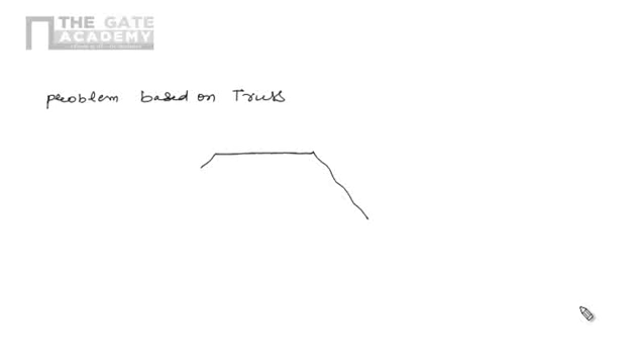Now we will solve some of the problems based on truss. Problem based on truss. Now in the problem, a simply supported truss is given. I am just drawing the simply supported truss which is given in the problem. I am just drawing the various members of the simply supported truss. So this one is the simply supported truss.

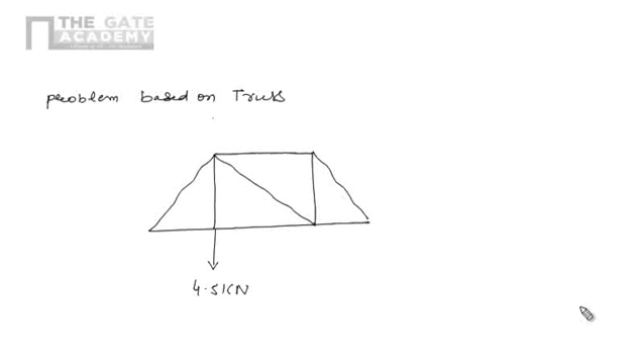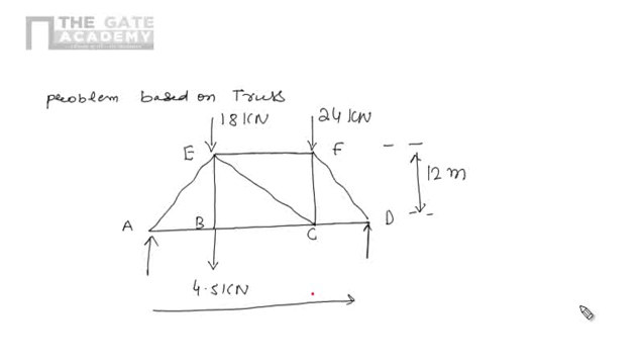Here we are applying a force of 4.5 kilonewton. Here we are applying a force of 18 kilonewton. Here we are applying a force of 24 kilonewton. And these are the points A, B, C, D, E, and F. And here there is a simple support. Here also there is a simple support. And this distance is given 12 meter. And the whole distance is given 3 at the rate of 9 meter equals to 27 meters.

So this is the given problem, in which we are interested in force in member FC. So here we are only interested in the force in FC. So definitely we have to use the method of section. But before applying the method of section, or as a part of method of section, first of all we have to find out reaction at the support. So first of all we have to identify the supports. Here there is simple support at A and D. So we know at simple support there will be reaction RA and RD.

So now for finding reaction RA and RD, we can apply the condition of equilibrium. Here there is no horizontal force, so directly we are applying the condition based on vertical forces. So algebraic summation of all vertical forces should be zero. This one is the equilibrium condition. So vertical, or we can say along y direction. So this one is positive y and this one is negative y. So algebraic summation of all vertical forces or forces along y direction should be zero.

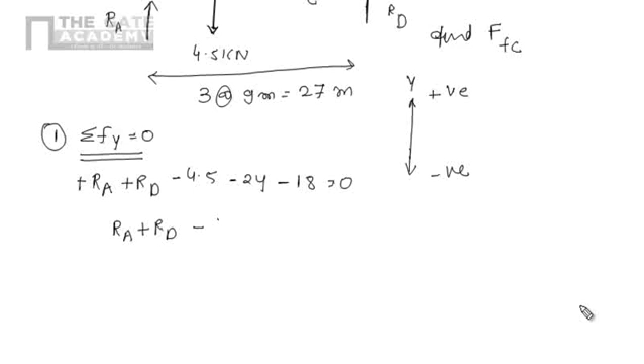So there are forces in y direction. RA is acting in upward direction, so positive. Similarly, RD is also acting in upward direction, so positive. This 4.5 is acting downward, so minus 4.5. This 24 is also acting downward, so minus 24. And this 18 is also acting in downward direction, so minus 18, equals 0. So RA plus RD minus 46.5 equals 0. So RA plus RD equals 46.5.

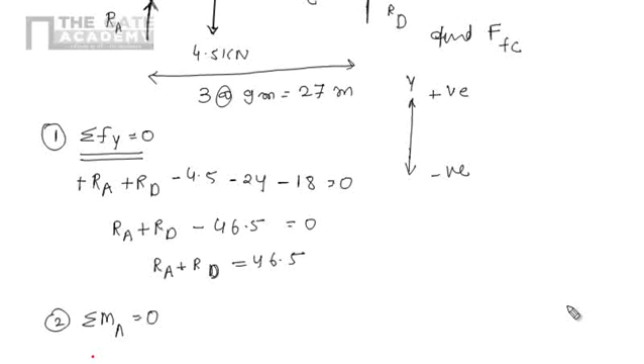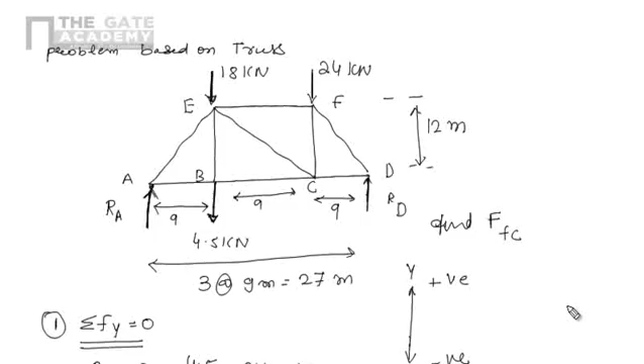Now apply condition number 2, that is algebraic summation of moments of all the forces about A should be 0. At A we are having the force RA, so moment due to RA at A will be 0 because the perpendicular distance is 0. So RA into 0. We are having the force 4.5 kilonewton here and the force of 18 kilonewton here. This distance is 9, this one is also 9, and this one is also 9. So moment due to this 18 and 4.5, we can write 18 plus 4.5 into 9, because the perpendicular distance is 9. And by our convention, clockwise is positive, anti-clockwise is negative, so it will be positive.

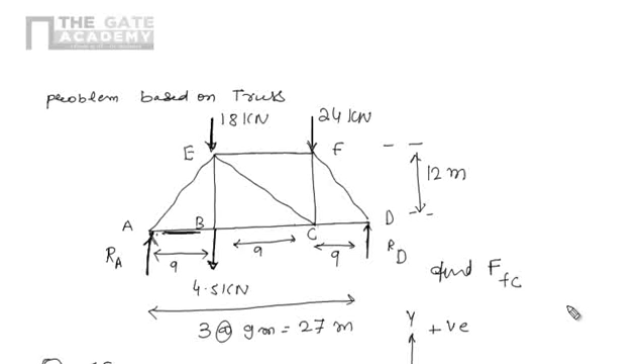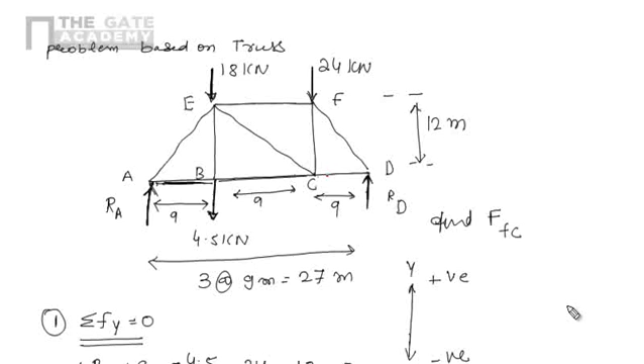Similarly, for this 24 kilonewton, the line of action is passing through point C, and the distance between A to C is 9 plus 9, 18. So the moment at A due to this 24 is 24 into 18, and the direction is clockwise, so positive. Due to RD, the perpendicular distance is 9 plus 9 plus 9, that is 27, and the direction of moment is anti-clockwise, so negative, equals to 0.

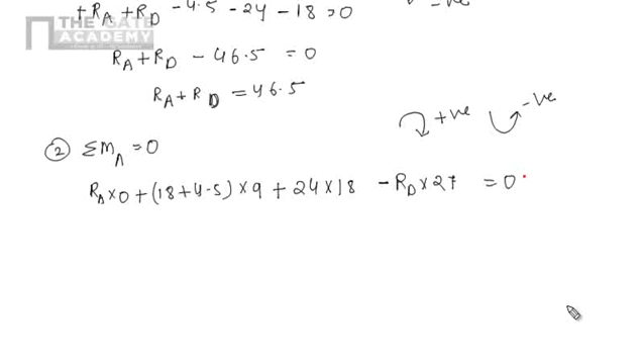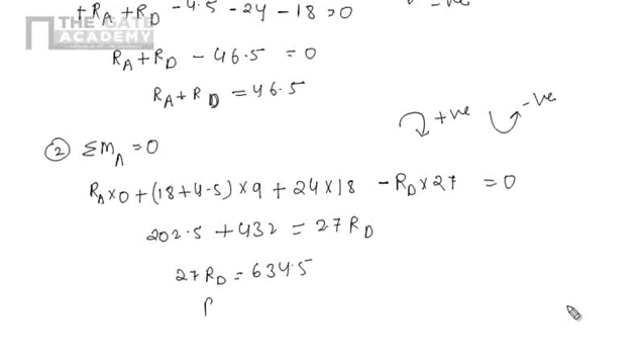If we solve this, we have 202.5 plus 432 equals 27 RD. So in total, 27 RD equals 634.5. So RD will be 634.5 divided by 27. So RD will be 23.5 kilonewton.

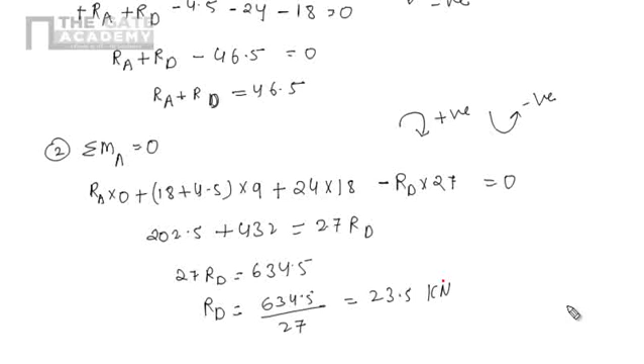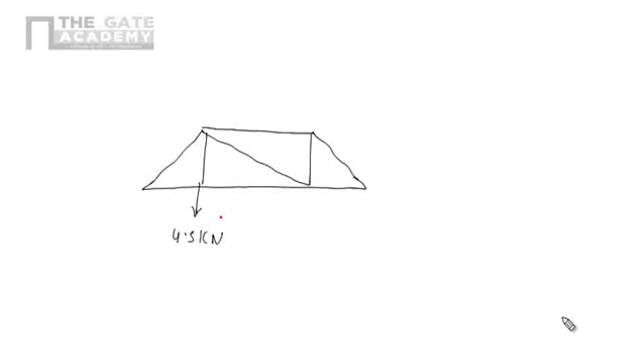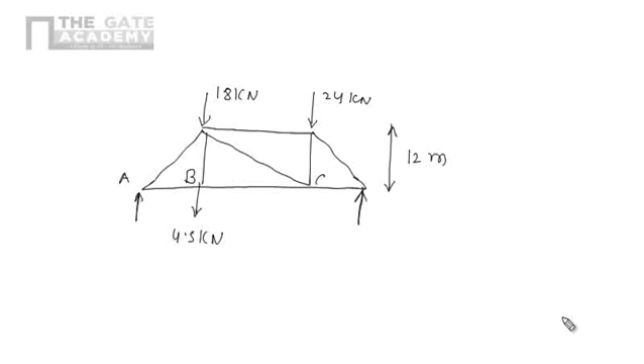Now we use the method of section for solving this problem. So I am again drawing the given truss. This one is the given truss. And these are the forces: 4.5 kilonewton, 18 kilonewton, 24 kilonewton. This distance is 12 meter. This is point A, the support is there. These are points B, C, D, E and F, and these distances are 9 meter, 9 meter and 9 meter. So again I draw the truss diagram.

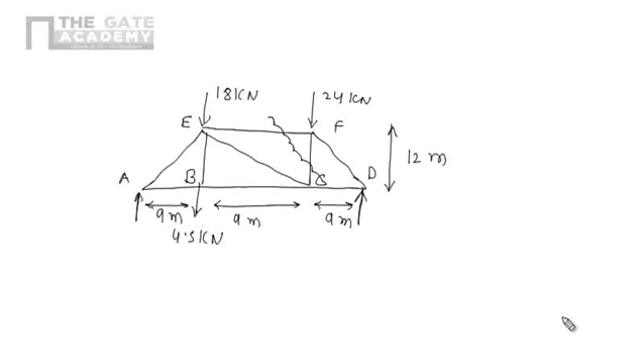And now we are interested in the member FC. So by method of section, we have to cut the section such that it passes through 3 or fewer members. If we cut the section like that, then we can easily solve this problem. So now draw the free body diagram of the smaller part.

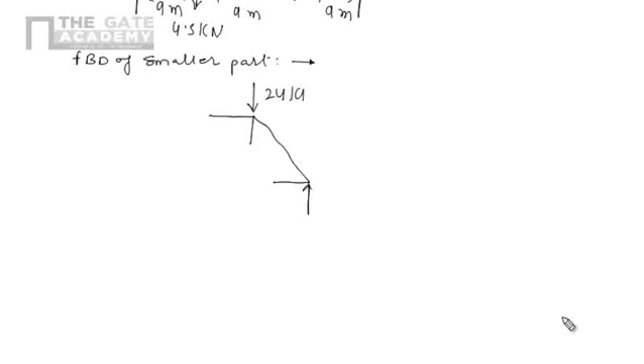So this one will be the free body diagram of the smaller part. This is 24 kilonewton. This is the reaction RD. We already know the value of RD. It is nothing but 23.5. Now these are the members we cut with the section.

So according to our assumption, we will draw the tensile force, because our assumption is assume all the forces in the members are tensile. So for marking the tensile force, the arrow will be away from joint. So this one is the force FFE. This one, yeah, this one is the force FCF. This one is the force FCD.

So these are the forces we are having right now, and now we are interested only in the force in the member FC. So directly by applying the equilibrium condition, that is algebraic summation of all vertical forces should be 0. So here in vertical direction we are having positive and negative.

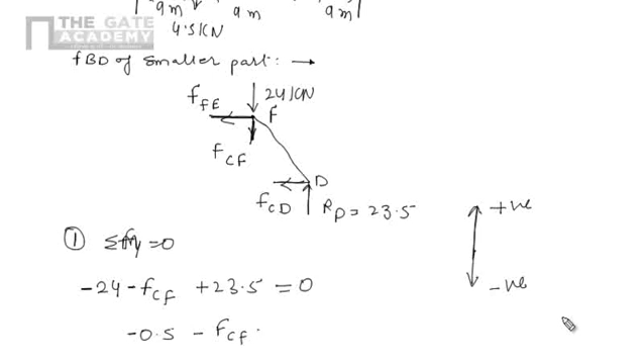So according to our sign convention, we can write 24, it is in negative direction, so minus 24. Then FCF, that is in downward direction, so negative. And RD, that is 23.5, it is in upward direction, so positive. So now I am having minus 0.5 minus FCF equals 0, minus 0.5 equals FCF, or we can say FFC. So the value of CF here is 0.5.

So we can say that FFC will be 0.5 kilonewton, and the negative sign shows the nature will be compressive. So by this way we can easily find out the value of FC by applying the method of section. In the same problem, if we are also interested in force in the member CE, then how can we find out force in the member CE?

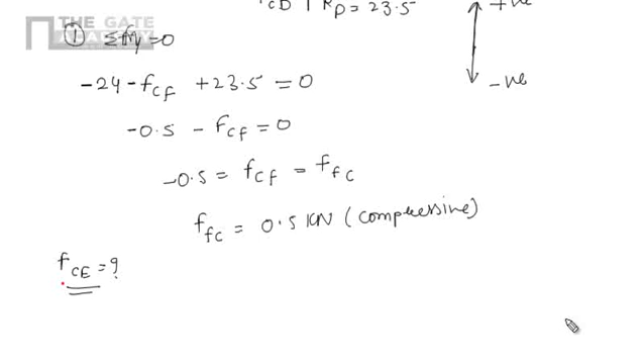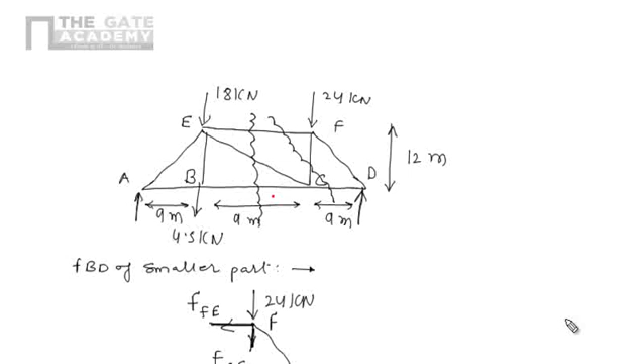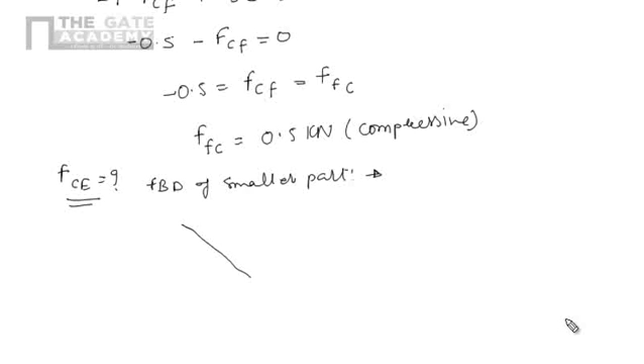So again we will apply the same method, that is method of section, but we have to cut the section so that it passes through member CE. So now let's cut the section as shown in figure. It should pass through 3 or less than 3 members, and now we have to draw the free body diagram of the smaller part. So now we are having this thing here. This is nothing but RD equals 23.5.

We are having 24 kilonewton force also. Now we are having this cut member, this cut member, and this cut member. And according to our assumption, we have to show the forces as tensile, so away from joint. This joint is F. This force will be FFE. This force will be CE. This joint is C, away from the joint, and this force will be FCB. So this one is the free body diagram for this cut section, and we want this angle theta.

So now we can easily see if we extend this thing here, we will get the point E, and if we extend here, we will get the point B. So we know this thing is 12 and this whole thing is 9 meter. So now we can easily see the cos theta and the sin theta here. So here that is 12, this one is 9, so this will be 15 by Pythagoras theorem. It is nothing but square root of 12 square plus 9 square, so we will get 15.

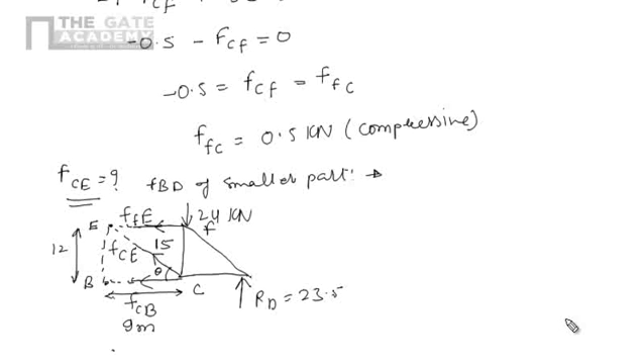So now we can easily say that cos theta is nothing but base upon hypotenuse, 9 by 15, and similarly sin theta is nothing but perpendicular upon hypotenuse. So by this way we can easily find out the value of cos theta and sin theta. Now we are interested only in the value of FCE. So only one unknown is there.

So we can directly apply the equilibrium condition based on vertical force, that is algebraic summation of all vertical forces should be 0. So now we are having 24 kilonewton, that is downward, so it will be minus 24. We are having 23.5, it is upward, so 23.5. And the component of FCE in vertical direction, that is FCE sin theta, it is upward, so positive, should be 0. So here I am having minus 0.5 plus FCE sin theta equals 0.

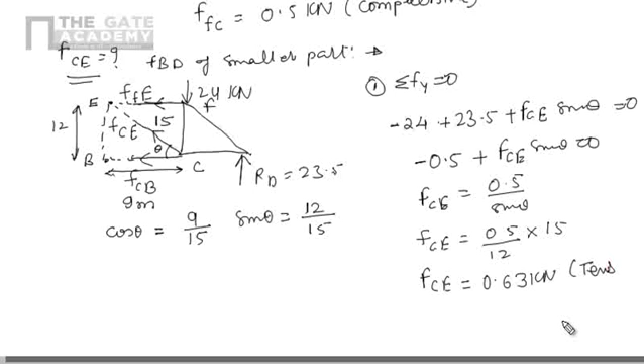So FCE equals 0.5 by sin theta, and we know the value of sin theta is nothing but 12 by 15, and if we simplify this, we will get FCE equals 0.63 kilonewton. The sign is coming positive, so it means it is tensile. So by this way we can easily solve this problem of engineering mechanics, which was asked in GATE 2008. So now we will see the problem of GATE 2008.

Here in this problem, consider a truss PQR as shown in figure. That is the truss given in the problem, that is point P, Q, and this one is R.

The Q point is a hinge joint, and at R there is a roller support, and here the force F is applied in the vertically downward direction. This angle is 45 degrees, this angle is 30 degrees. Now we have to find out the tension in the member QR, or force in the member QR, in terms of F. So we have to find out TQR in terms of F.

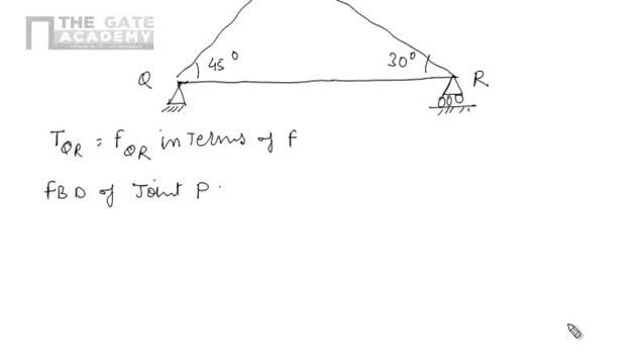So let's take joint P. Now we will draw the free body diagram of joint P. Before that we will mark some angles here. This angle is 90, this angle is 90, so this angle will be 45 because the sum of the three angles will be 180: 45 plus 45 plus 90 is 180. Similarly here we have the angle 60 degrees because 60 plus 30 is 90, and 90 plus 90 is 180 degrees. So now we have the angles.

So just draw the free body diagram at point P. Force F is coming, and there are two members here. That is point P, and let's assume tensile forces. This one is FPQ, and this one is FPR. So there are two forces, FPQ and FPR, and we know these angles: this one is 45 degrees, this one is 60 degrees. Now apply the conditions of equilibrium, that is, the algebraic summation of all horizontal forces should be zero. According to our sign convention, positive x is positive, negative x is negative, positive y is positive, and negative y is negative.

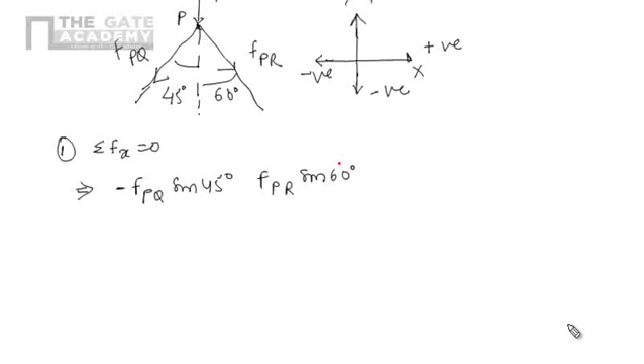In the x direction we have the horizontal component of FPQ, that is FPQ sine 45 degrees; it is in negative x, so negative. Similarly, the horizontal component of FPR is FPR sine 60 degrees, in the positive direction, equals 0. So FPQ sine 45 equals FPR sine 60 degrees. So FPR will be FPQ sine 45 by sine 60, that is FPQ into 1 by root 2 over root 3 by 2. So we get FPR equals FPQ into root 2 by root 3.

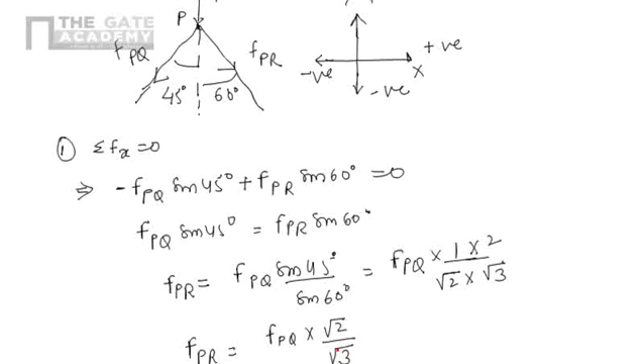Now apply condition number 2, that is, the algebraic summation of all vertical forces should be 0. In the vertical downward direction there is F, which is negative because it is downward. The downward component of FPQ is FPQ cos 45, negative. Similarly the downward component of FPR is FPR cos 60, negative, and the sum should be 0. So minus F minus FPQ cos 45, and in place of FPR we can write FPQ into root 2 by root 3 cos 60 degrees, equals 0.

Now we rewrite this equation: minus F minus FPQ by root 2 minus FPQ root 2 by root 3 into 1 by 2 equals 0. That is minus F minus FPQ by root 2 minus FPQ by root 2 into root 3 equals 0. Then we can write minus F equals FPQ by root 2, taking it common, into 1 plus 1 by root 3. So minus F equals 1.577 by root 2 into FPQ. So we get minus 0.896 F equals FPQ. So now we have the force in member PQ in terms of F: it is minus 0.896 F.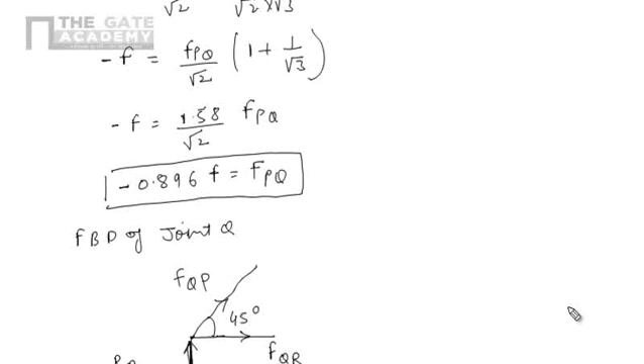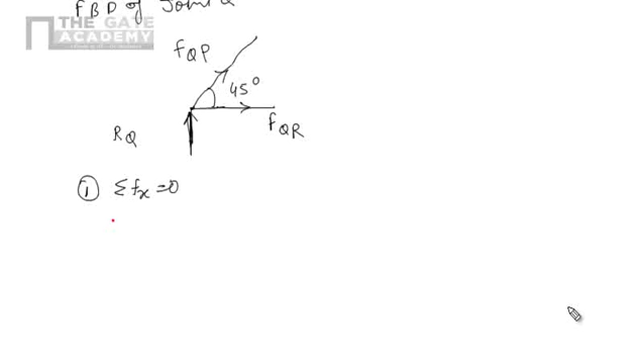If we apply the equilibrium condition in the horizontal direction, we can easily find FQR. The algebraic summation of all horizontal forces should be 0. Horizontally we have FQR in the positive direction, and the component of FQP, that is FQP cos 45 degrees, also in the positive direction, and the sum will be 0. So we put the value of FPQ, minus 0.896 F, and cos 45 is 1 by root 2. Simplifying, we get 0.633 F, and it is coming positive, so the nature will be tensile. So the force in member QR is 0.633 F, and the nature is tensile.